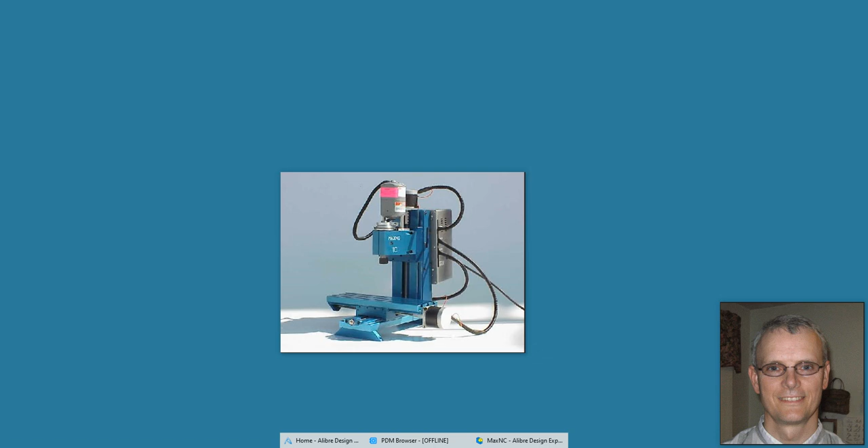I purchased my components mainly from Amazon, and to get to a point where I could take the components I purchased and put them on a machine, I ended up making 3D models. The program I used was...

Alibre Design. I am a design expert here, and as I said, this is my home system.

When I work at the office, I use Siemens and UGNX CAD software. And when I taught, I used their AutoCAD products, which went from Inventor to Mechanical Desktop to just plain AutoCAD software.

But here, I reversed all the components, basically took measurements off the machine so I could reverse engineer it. And then I reverse engineered all the components, my components being the stepper motors,

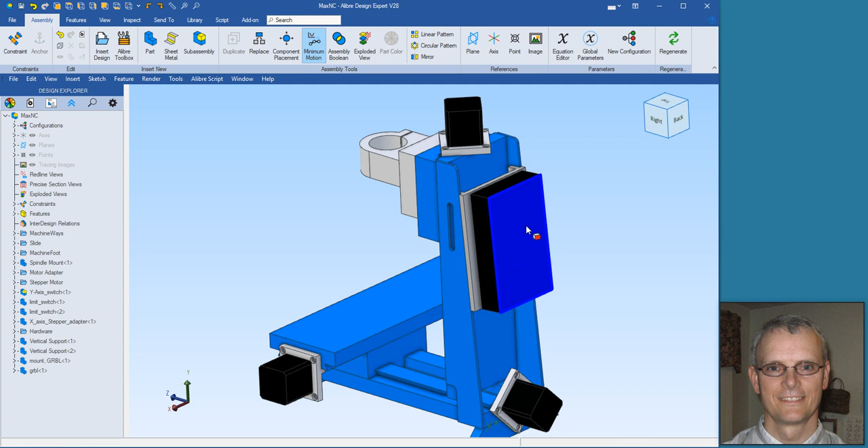in a really basic way, the GRBL control box, and also limit switches.

I put them in the position that they needed to be in, and then I designed 3D components, brackets, for holding these. For some of these brackets, I built in mounting places for the limit switches.

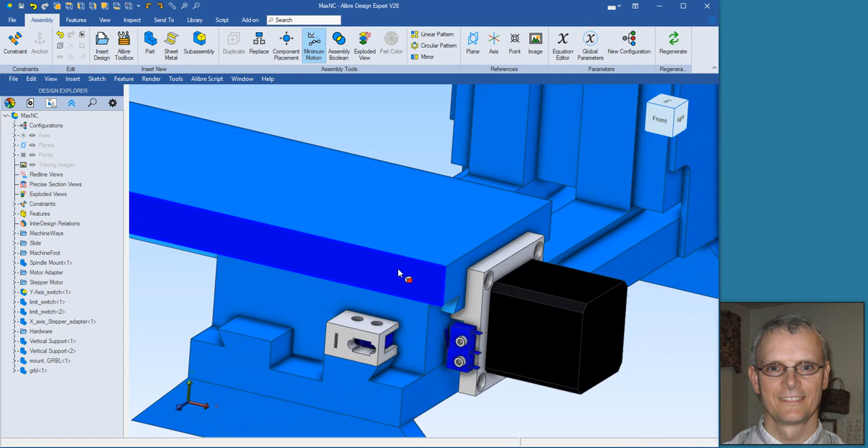So if I take my table, move it back and forth, you can see where it hits on the side of the table, which would cause the limit switch to act out. Also for the y-axis, same thing.

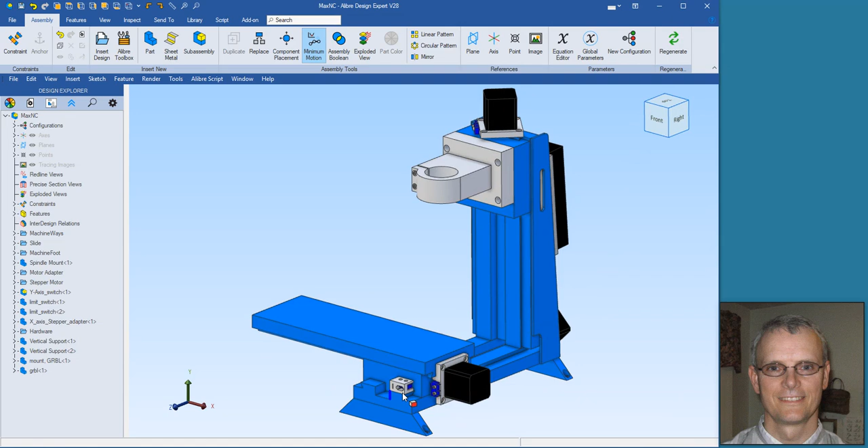My components in here, such as this one limit switch, is for the y-axis. This is different from the others two, which are built into the stepper motor mounts. It's different because there was no good place to add it in the back, since nothing comes back to touch it off.

I created a GRBL mounting plate so I could mount the controller. Once I had designed all the components in CAD, which included designing this spindle motor mount...

Once I designed all these components, I created the models by 3D printing. Once I printed the 3D components, I did an assembly with all the parts.

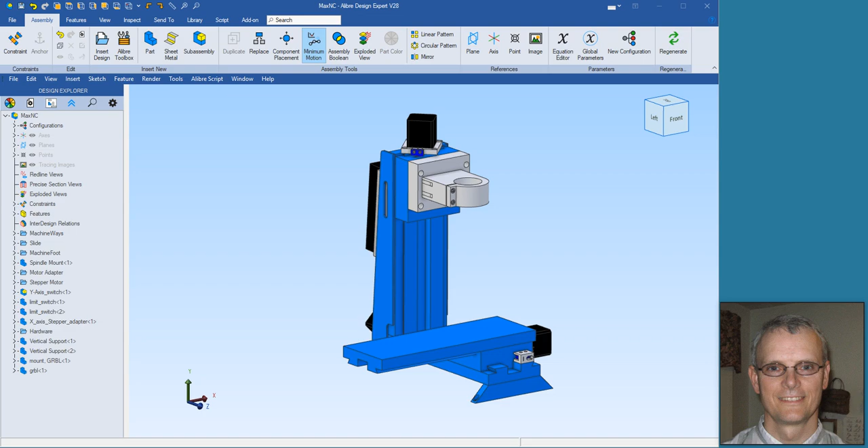It has a homing function, which is important on these types of machines. Using anything GRBL, it's important that you use a homing switch, so it'll home down to this corner, and the top will home up here. This way the machine knows where X0 is set for the machine.

It goes from 0 to about 10,000. It can go to 10,000. I think I've only taken it up to maybe 2 or 3,000 at the most. I have some switches mounted on the side, controlled here for pause, stop, and emergency stop.

The machine is actually going at a fairly decent speed, as fast as it went last time. I wanted to show off this conversion project that I had done, and wanted to present it in this manner. I hope everybody has a good day, and I'll turn this off as soon as it finishes this run.